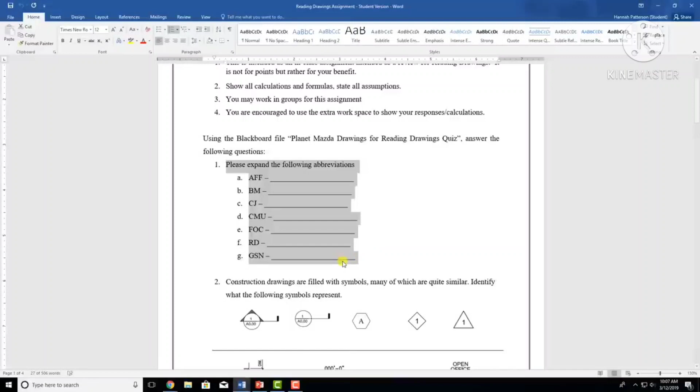So this is about 25 questions, I believe, and it takes the students through a set of plans. This is called Planet Mazda, so anytime I'm saying Planet Mazda, that's the name of the project. The first thing students need to do is find out where to expand abbreviations. There are so many abbreviations in construction that there is no way one person can know all of them. They change with different companies and different sets of plans on different projects.

So understanding what the abbreviations mean is a really important part of being able to read drawings. Next, construction drawings are filled with symbols. I took snippets of different symbols, directly from the set of plans we're going to go through in a minute, and students just have to tell me what they mean. Because if you don't know the difference between this and this, or these two - which are both ones, but one is in a diamond and one is in a triangle - it's going to make it much harder to understand the drawings.

Now we're going to move down and look at the different images. There are different symbols like these, and then there are different shading and different material symbols.

So this right here, the squigglies, means something different than the hash marks right here, which means something different than all of these dots right here. So we're going to get through that in a minute.

Next is just basic questions. It's a little bit of a Where's Waldo, but it helps you know which section to go to. So the building envelope passed code inspection by what percent? Are these drawings SD, DD, or CD? We'll get to what those three mean in a minute.

Linear footage of 4-inch PVC domestic water line required. What is the ordinance number for the City of Las Vegas fire hydrant requirements? What is the total number of parking spaces between the existing car dealership, the new car dealership, and the sales inventory parking? This project is called Planet Mazda, Mazda meaning the car company Mazda.

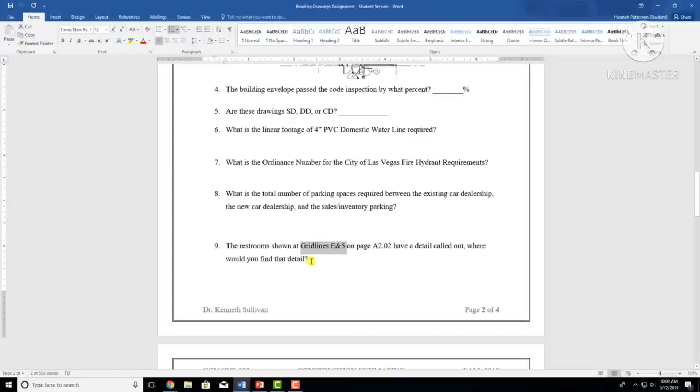Construction drawings obviously have a scale, and the scale might vary by page, or even on a certain page there might be a couple different scales. So that's one of the most important things to look at, especially in an estimating class. So we're going to look at the scales.

Then the service bays, how wide is each bay, so finding dimensions. The total length of the north wall from oil storage to the end of the service bays. So this is being able to pinpoint different areas and find dimensions.

The height of the building at the tallest part, that'll get us into elevations. What is the FFE? On which side of the building are the 4 primary signs? So this is all to do with the elevations.

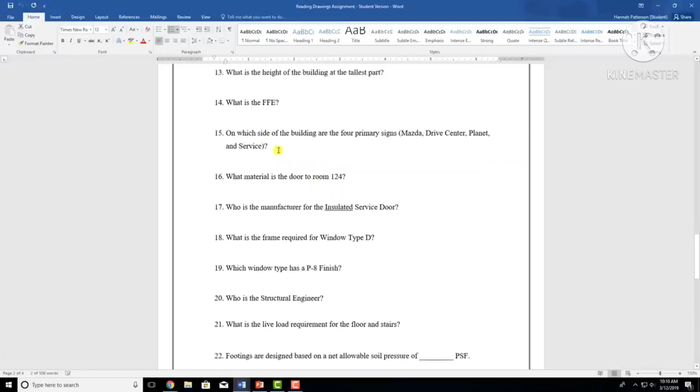What material is the door to room 124? Who is the manufacturer for the insulated service door? Notice insulated is underlined. What is the frame required for window type D? Which window has a P8 finish? So all of these are going to introduce the door and window schedule.

Who is the structural engineer is going to tell us who to contact if you have a problem or question. Live load requirement for the floor and stairs. Footings are designed based on the net allowable soil pressure of what PSF? And for a typical column base, what's the minimum concrete cover for structural steel below grade? So all of these are going to get into the structural notes and the structural details.

Also, for joints on slab on grade, what's the maximum allowable time to pass between placing the concrete and cutting a contraction joint? 12 areas on the foundation plan indicate a thicker foundation requirement. Identify where they are located and why the thicker slab is required.

So identifying where it's located is easy. The why it's important is kind of getting the students to think about the project, think about where those slabs are, and why it might need to be thickened only in those specific areas.

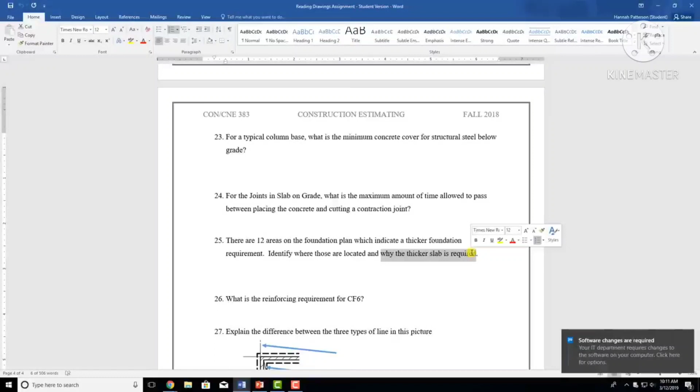Then what is the reinforcing requirement for CF6? So students also need to know what CF is, and then where to find the 6th one, and then also to find the reinforcing requirement.

Different types of lines on a drawing will mean different things. So this is also kind of going back up to the symbols and the different designations on the drawing. So we're going to get through the different types of lines. Then we're going to actually do a takeoff.

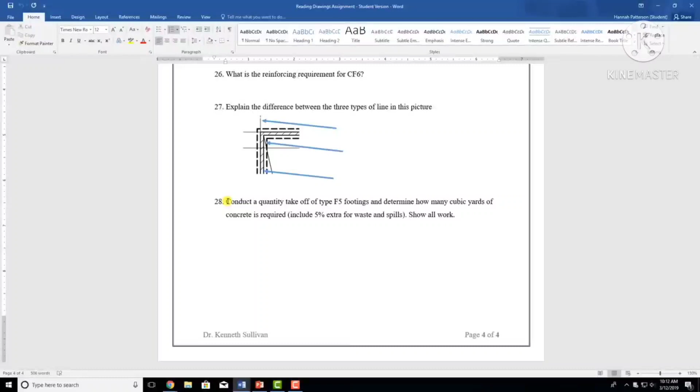So this is intended for a construction estimating class. We give this to the students at the very beginning of the semester, really without the expectation that they know how to do it. However, we wanted to see kind of where the class is.

Another thing that we ask students to do is to spend no more than 1 hour on this assignment. Our class of about 100 has a very wide variety of experience and different majors. We have a few people that have only ever taken construction classes, and a few where this is their first construction class. So this really just gives us a baseline of where they are in the class with reading drawings and being able to understand what they're looking at if we give them a set of plans.

So we tell them to take at most 1 hour to try and solve this, and then see where you get. We're now going to move on to the plans.

I'm going to walk you through those real quick. So these are the Planet Mazda plans, a 14-page document. I'm just going to flip through real quick.

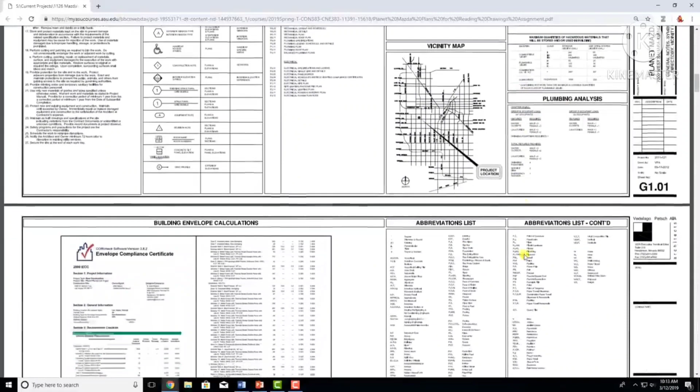So there's a rendering, there's the different contacts, then you've got your first page with all of your general notes. I'm just going to scroll through so you can see what we're looking at: there's a cover sheet, more notes, site plan, then floor plan, elevations, windows, doors, notes. I really just tried to take at least 1 or 2 pages from every section, so that students can understand better what they're looking at if they're given an entire section.

So in order to start with the basics, I'm going to go to a little PowerPoint we have that goes through just kind of what construction drawings are, how they're broken down. It's like a book kind of. So, basics of reading construction drawings.

So there are different sections within a set of documents. You have your civil, architectural, structural, mechanical, electrical, and plumbing. These are also going to vary by the drawings, but pretty much every set of plans will have these, which is why we included these. These are the main 6.

However, it's also very common to have your fire protection, to have your site work somewhere different, to have your landscaping. There's a lot of different things that can go into it, and we'll get into knowing what section you're in just a second.

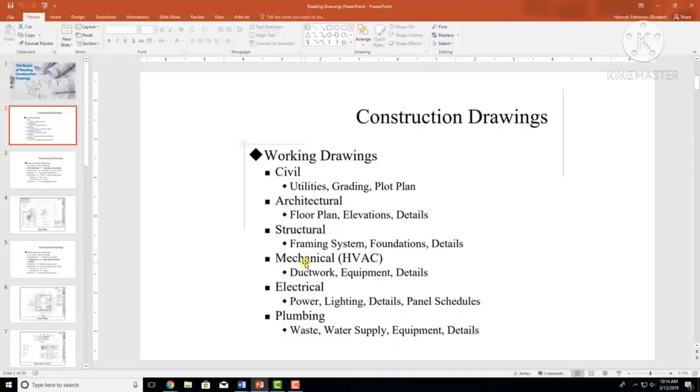So we're first going to start with our site drawings. Notice that it goes site drawings C. So each page, if I bring up the drawings again, each page will have a little note in the bottom right.

G1.01, that is your page number. G means general, and 1.01 tells you the page. So if I tell you to go to M2.02, that means mechanical 2.02. You can see they kind of go in order, G1.02, and then here we have an entirely different one.

So this was done by a consultant, this one's for the landscaping. And we're going to get into another one, and see it says 2 of 7. However, since I snipped them all together, we don't have most of these.

Then we get into A, 1.01, so these are your architectural. Here's more architectural, see we jumped quite a bit. Then you've got more architectural, architectural again, and again. And then we get into S, which is structural.

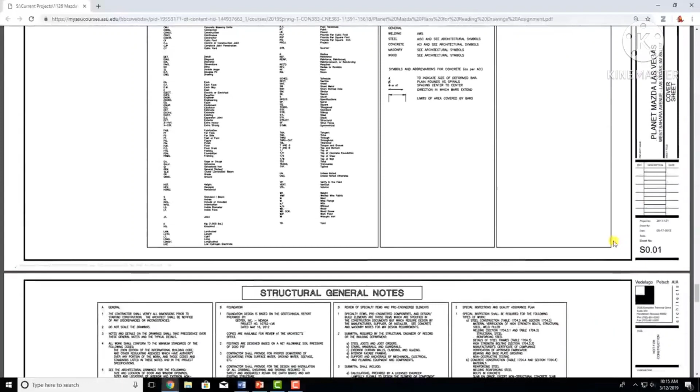So this is structural 0.01, which usually indicates a cover page of some sort. Then we have 0.11, and then 2.01, so now we're getting into the real meat of it. And then 5.01, and that's all I took from these drawings. But that'll tell you what page you're on, it's really how the drawings are organized.

If you don't realize there's an airport a mile away, it's going to be problematic. If you don't know what is in your surroundings, there's going to be a lot of problems that are going to arise later. So the site plan tells you what is around my site that I need to worry about.

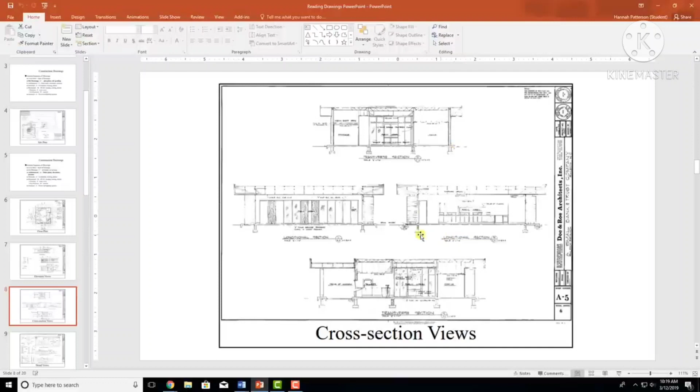Then you have your cross section. Elevation views are only from the outside of the building. Your cross section views would be if you were to cut your building in half and look at it from a certain point. We'll get into the different cross section designations in a bit, but a cross section is if you were to splice your building in half, or maybe just take a certain room, and it will show you a very detailed breakdown of that room. So you have your different cross sections.

Then you have details. Details are going to be in areas that need special attention. Oftentimes something like an ADA restroom will have a specific detail to it, because those dimensions have to be very precise. Anything which needs special attention will have a detail.

Then you get into your schedules. A lot of people confuse this with a time schedule, so this is not saying I need 4 months to build a project. This is a table that outlines the pertinent information, typically for finishes, doors, and windows - those are the most common. So it'll say something like Office 1, Room 101, then West Wall, paint, East Wall, paint, North Wall, glass - something like that, where it tells you the finishes for each room.

Then you have your doors, because there are numerous different kinds of doors - they might have different finishes, some might be metal while some are wood. So it'll say Room 101, Office, Door, Wood, or it'll say Room whatever, Kitchen, double swinging metal doors. And those will all be abbreviations too, so you'll have to know how to get back to the abbreviation section. Then it'll tell you the different kinds of windows that are in the project.

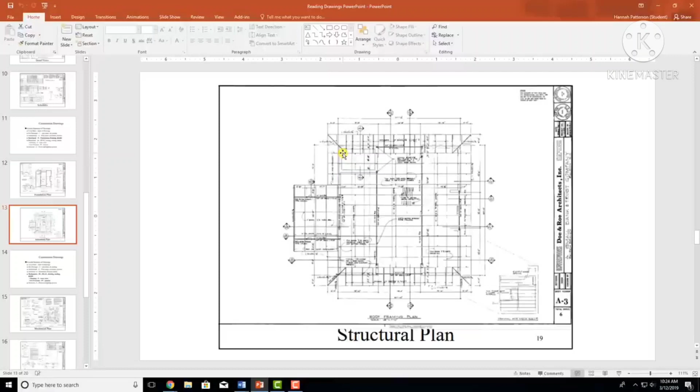Now we're going to get into mechanical. In our estimating class, we don't have the students worry about mechanical, electrical, or plumbing because there are separate classes which focus on those. So I'm going to go through these real quick just so you know how to read them, but we're not going to focus on them at all.

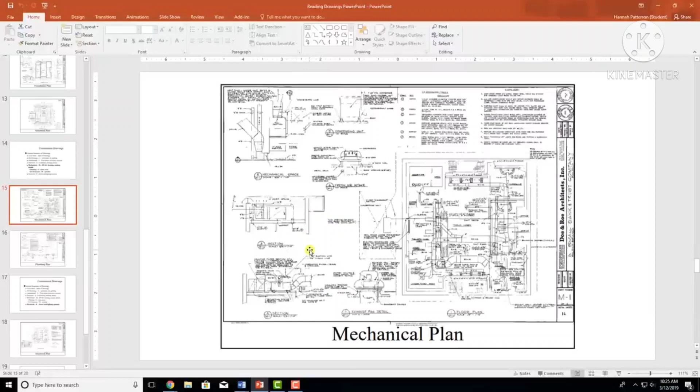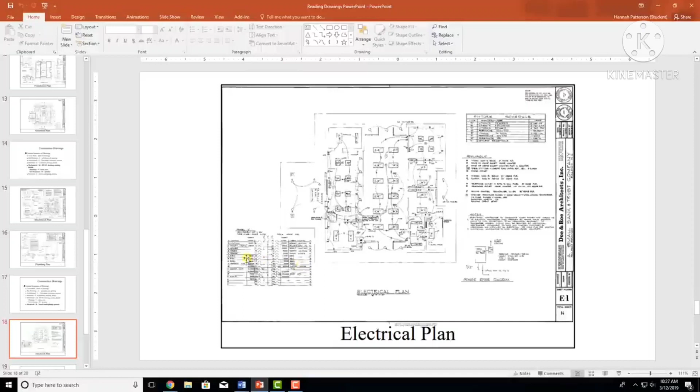So then keep going, and you'll see these are also lights, so that's a different kind. And it looks like there's a schedule here and here. They're just very hard to read because it's very poor quality, but these will tell you, alright, this rectangle means it's this kind of light, this circle means it's this kind of light, this square is this kind. So it really breaks it down so you know, alright, if I have 18 of these rectangles, it means I have 18 of this light fixture.

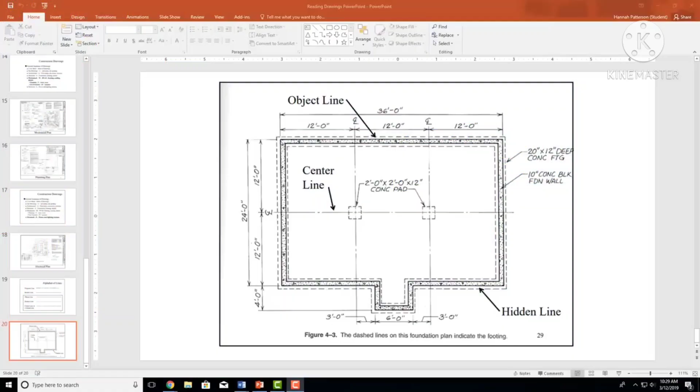So here's our answer key. What I'm going to do is read the question, and then we're going to go to the drawings, and I'll show you where I found the answer. A lot of these will actually have the answer right there, but it will tell you where you want to be looking for it.

So we're going to start with question 1: expand the following abbreviations. Looking at this, your abbreviations will be found pretty much on the first page. I'm in the general section here, and this is where all this writing is, so it's pretty easy to read through it real quick. General notes, not what I want. Project directory tells you who's in there, not what I want either.

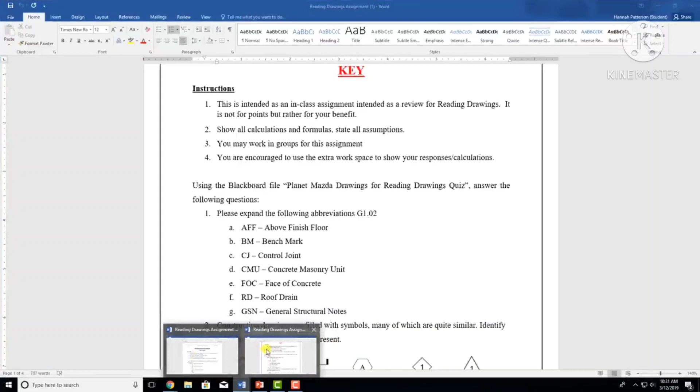Symbol legend - since we looked ahead on this assignment, we know we're going to need that in a second, so tuck that in the back of your mind that that's where the symbols are. Then we're going to go back because that wasn't what we wanted.

So we've got sheet index. This is a really important part of the drawings - knowing what sheets should be included. Clearly you don't have all of them because you only have 14 pages in this version, but this is telling you what sheets should be in there if you have a full set. One of the most important parts of being an estimator is checking to see if you have all the sheets, because if you're missing one of these, it could mess up your estimate by a lot. So before you sign off saying 'yes, I have received the drawings,' just flip through real quick and check: do I have A401, A411, A412, A501, A502, and make sure you actually have everything.

Also, keep in mind how these are organized - this is a really good way to see it. Here's your architecturals, which all start with A. Within architectural, you have subsections. ADA is the Americans with Disabilities Act, so that is all of your accessible bathrooms, wheelchair ramps, signage, things such as that. You have ADA 1, 2, and 3, so those are your ADA details.

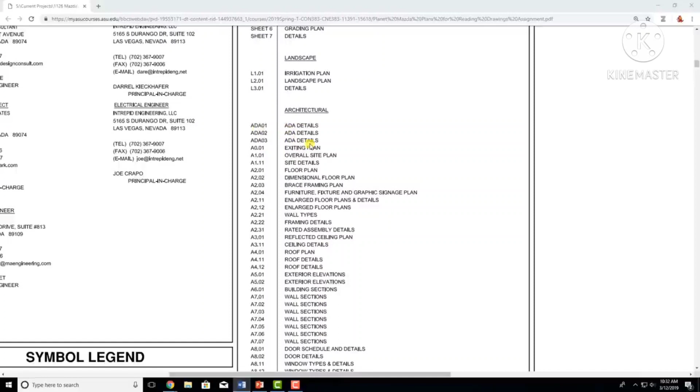A0.01 is exiting, and then A1-point-something shows your site plans. A2-point-something, which you can see there's a lot of them, is going to show what your actual building looks like. Then you get into A3, which is your ceiling - reflected ceiling plan and ceiling details. A4-point-something is all of your roof. A5-point-something is exterior. 6 is your building sections. A7 all the way through is all your wall sections. 8 is your doors and windows. Then 9 is finish material, room finish schedule, and all your interior - so 9 is really all of your finishes and interiors. And then 11 is just anything miscellaneous.

So it's broken down pretty straightforward, but keep in mind this will change for all the different jobs you're on. So if you're looking at 3 different drawings, they're all going to be somewhat similar with what goes into architectural and structural, but they're going to be numbered differently depending on the company and the architect.

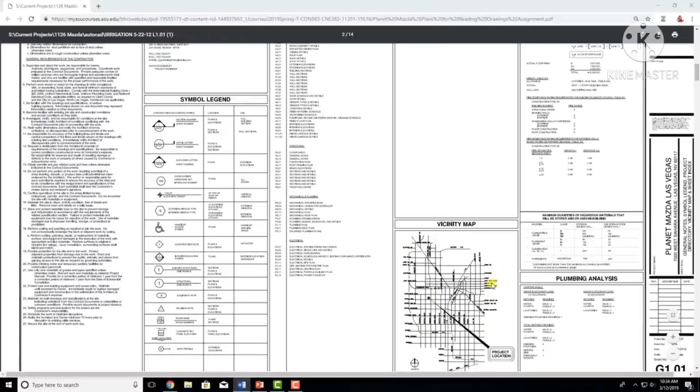Then up here, your code analysis, so this is to see if your building is actually up to code. Then you've got a plumbing analysis and the maximum quantities of hazardous materials that will be stored and or used in the building. Depending on what you're building, you might have hazardous materials. This is a car dealership, so it's probably not going to be much, but if you're doing something like a research lab or a hospital, there could be hazardous materials you need to be aware of.

Then we're going to move down. Here's the building envelope calculations. You also know you're going to need this a little bit later because we've read through our questions ahead of time. That's also a really good trick with estimating.

Sometimes it works best to work backwards. So instead of going through this one by one, read through all of these and think, oh, down here I know they asked for the building envelope calculation, so I know I need to remember where that is. That's also a good idea if you're going to use RS Means or some other pricing tool like that. Look at the unit and then do the takeoff. I get into that in some of my other videos, but keep that in mind.

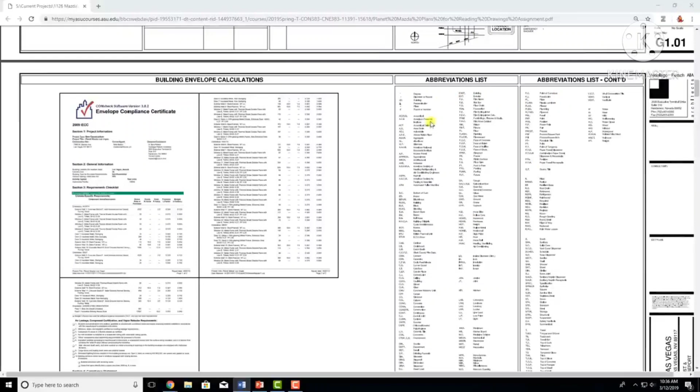So we're going to keep going, and we finally get to our abbreviations. This is what we need to answer the first question. It's pretty straightforward. You've got first symbols, then A's, B's, C's. It's just alphabetical.

The ones I specifically asked for are AFF, which in this case means above finished floor. That's one I chose, and most of these I chose because they're some of the most common. AFF is used in probably every drawing you will ever see. So a good example would be that this building is 122 AFF, which means it is 122 feet above finished floor, which basically tells you the height of the building, which we'll get into a little later.

The next one I asked for was BM, which can mean a couple things. It can either mean benchmark or beam. I didn't specify which it was, so either one is okay to answer.

CJ is the next one, which is control joint. That will be something used with your structural notes typically. Architectural will reference it so that you know how to build around it if it needs to be incorporated into the building, but where it really matters is your structural notes.

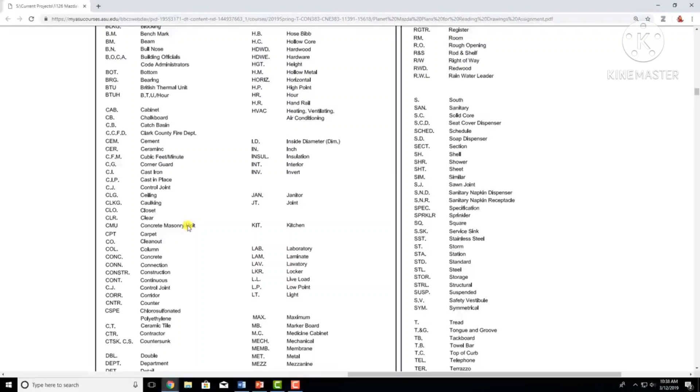We're going to get into CMU, which is right here, concrete masonry unit. That's if you're using concrete blocks to build your building. Then FOC is the next one, so we're going to go up here to F, and FOC means face of concrete.

Next one I asked for was RD as your roof drain. And then GSN is the last one I asked for, and that one's a bit tricky because it's not on here. That is something that is a very, very common abbreviation used in construction, but it's not really written anywhere. GSN means General Structural Notes.

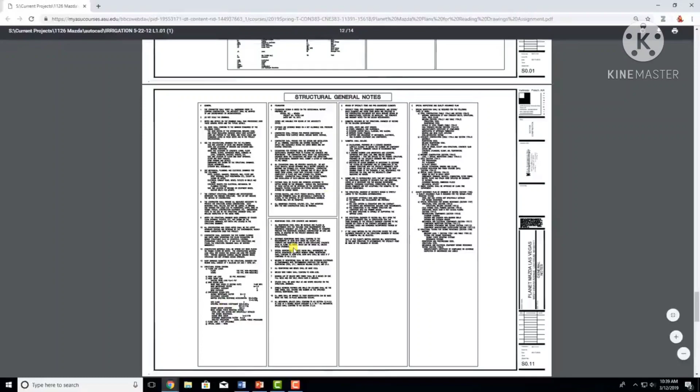On different pages, there's going to be different notes. So if I go down here to my architecturals, I've got general notes and keynotes. There are notes all throughout these drawings, and your GSNs are your general structural notes. In this case, it was structural general notes, but it basically means the cover page before you get into the actual floor plans and the drawings will just have a ton of notes. These notes have a ton of information that you need to know, like different requirements for reinforcing steel, your foundation, specialty items, your general notes.

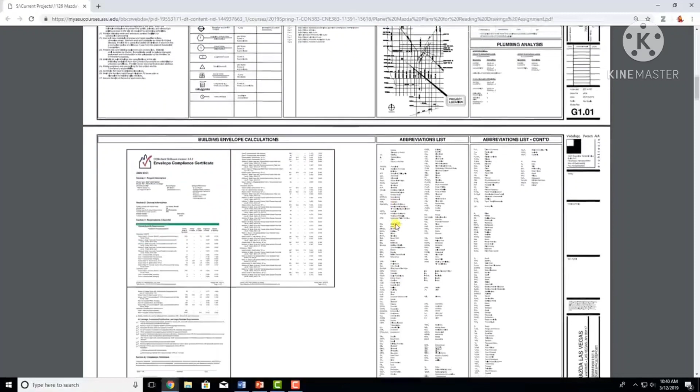So this tells you, alright, your building is concrete, but now I need to know what are my reinforcing requirements, how long do I need to wait before saw cutting, different things like that. What are my ASTM requirements? So your GSNs have a lot of information. I wasn't necessarily trying to trick the students, but they need to know that if a note says refer to GSN, it means refer to your general structural notes.

Alright, so we got through the first one. Now we're going to move on to here, to your different symbols. I mentioned that we pasted those, and those were taken from right here. I'm going to split the screen real quick so you can actually see which ones I'm asking for and which ones we're looking at.

So the first one right here matches that, which means it's a section number, a section indicator. We're going to get into that in a little while, but when you see that on a plan, this section is going to be much longer, so it's essentially going to slice a building. Going through the PowerPoint, I mentioned the different sections, and that's how you know if something is a section number. This top number will tell you what section it is, and the bottom number will tell you what page to find that cross section on. It's almost identical to a detail, except a detail doesn't have that arrow.

So the detail was the next one, and it's right here. Instead of going through these one by one, I'm just going to go through all of these. So you have your elevation, which looks very similar to a section, but instead of cutting the building in half with this line, I'm just looking at the whole building. This is going to show you basically all of it.

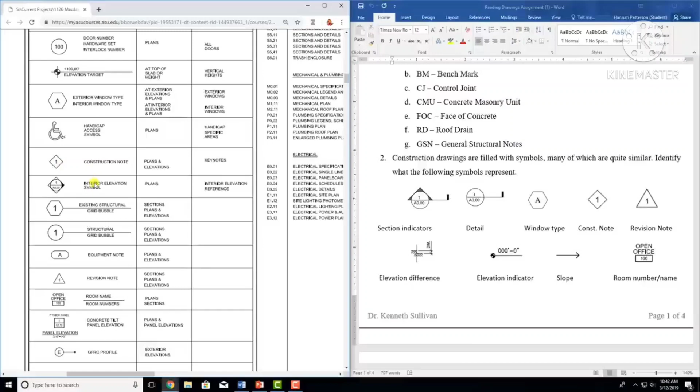It's a diamond with a number. If I jump ahead to your actual plans, this is a great example. All of these are notes, and every one has a different number that points to a different thing. If you scroll over, they all correspond to these keynotes. So again, it shows you up here the little diamond.

So if I go right here to this one, number 5, I don't know what number 5 is, I don't know anything about this right now. So you scroll over to number 5 and it tells you it's a metal panel, MP-3 typical. TYP means typical. So then you know, anywhere there's the number 5, it's a metal panel.

13, we don't know where that is. It's a little tiny thing sticking up right there, and you know it's signage. You're looking at the side of a sign, so it looks completely flat. But if you go over here to the other sides, on our elevations right now, you'll see the signage again, and there's the actual sign itself. So you're looking at this drive center sign right there from the side. If you zoom in there, you'll see that 13 again.

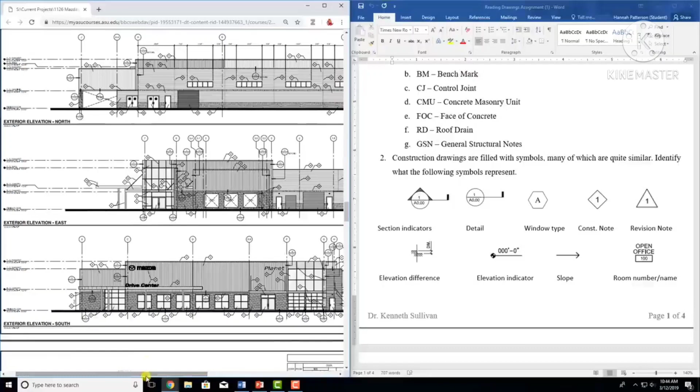So that's what a keynote is, and those are imperative when reading drawings. We're going to go back up and go through the rest of these symbols. Alright, so the next one is an interior elevation symbol, a little bit different than this one, which is an exterior elevation. These aren't as common - typically it'll just be section numbers instead of interior elevations, but it's good to know if you do come across one. Then you have existing structural, so it's a hexagon with a number.

So keep in mind, this is a hexagon with a letter for a window type.

A hexagon with a number is existing structural. Then you've got new structural, a circle with a number. So instead of existing, this is new. And this is very similar to your doors. However, if you look at the number, all of your doors will be in the hundreds, or will be 3 digits. So very similar designations, but very different meanings.

It's also good to just use a little bit of common sense when looking at the drawings. You know, there's going to be a lot of different door numbers. They're probably not all structural callouts. So if you have numerous of these, and they all seem to be in doorways, they're probably not structural.

This will be an equipment note, a revision note, so this is a good thing to know, because if you get different versions of a set of plans, it's going to change different areas of a building, and it might change them enough that it's a drastic difference. So let's say they take a bathroom that wasn't ADA compliant, and they make it ADA compliant. That is going to be a very big revision, and it's usually also going to have a cloud around that area. Unfortunately, I don't have an example of that in these drawings that I'm aware of. We might come across one, but it will look like a cloud, and it will have a revision note saying, change bathroom to be ADA compliant, see detail, whatever. So it'll tell you, hey, this changed, make sure you notice this.

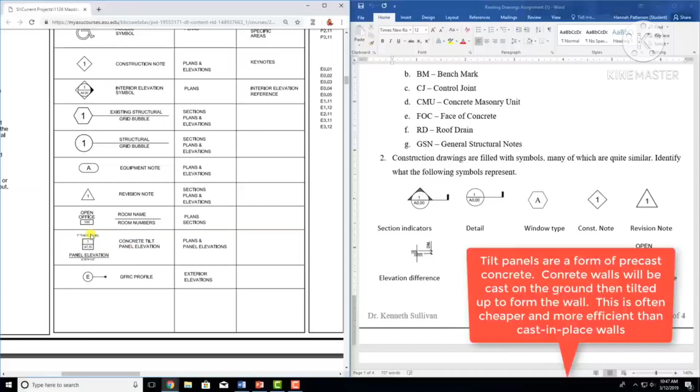Alright, keep going. We get concrete tilt panel elevation. So if this is a tilt-up, which I assume it is since this is in the symbols, it's going to tell you the different panels and where to find the elevation, which means looking from the side of that panel. I cut all of those out of this in my little 14-page version, so we're not going to worry about this. And then you have GFRC profile, and GFRC, I'll tell you, even I had to Google this. There are so many different abbreviations for different plans and different everything, it's glass fiber reinforced concrete. So this is going to be a concrete structure, which we'll get into later, looking at the different shading of the drawings. But if it has a circle and a letter, it's the GFRC profile.

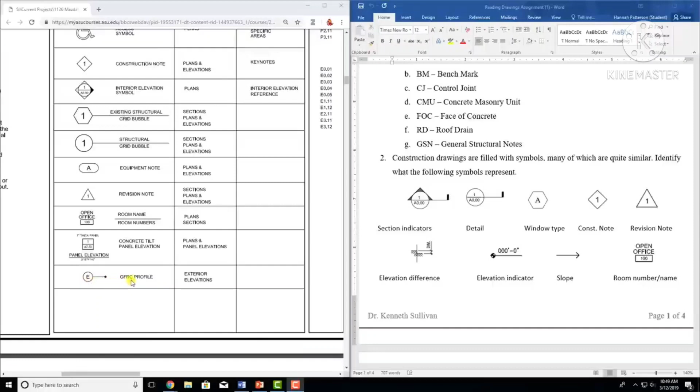Alright, so now we're going to get back into this. So I went through this top row and this bottom one, but I never saw these ones. So we just went through all of the different symbols, but never saw these. But as I told you, I took all of these straight from the drawings. So something to note, those were architectural symbols. Now we're going to move down, and we're going to get to the structural ones. So each different section will have a cover page with new abbreviations and new symbols. So it's a really good thing to keep in mind that if you're missing some sort of abbreviation, it might be in the structurals instead. So a lot of these are going to be similar, like CMU, Concrete Masonry Unit. That was in the architectural as well, but a lot of these won't be. So keep that in mind.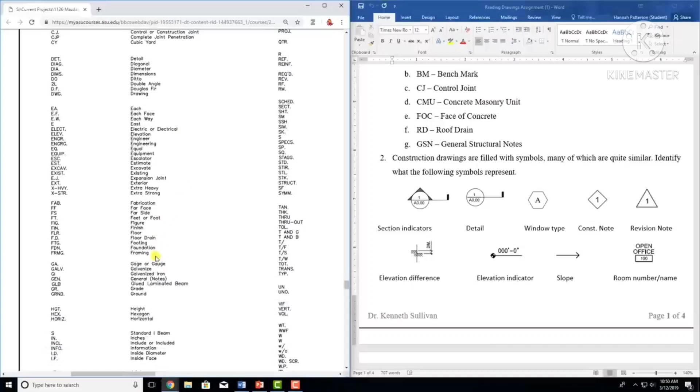And we're going to go over to these symbols, and now we can find these ones. So this is a change in elevation, so this will be used most commonly on something like a curb in your parking lot to show you how tall the curb needs to be, or maybe on a staircase, but that's less common. Elevation indicator is very similar to what was shown in the architectural ones, but just to show you there's a couple different ways it can be drawn. And then an arrow, which most people don't realize, is a slope. So the most common slopes are going to be on your roof or in a parking lot where you need to slope it towards a drain.

This is a car dealership, so there are going to be floor drains in various places in case oil spills or in case they need to wash something, and it's going to show sloping. It will also be in every bathroom because there's always a floor drain in the bathroom. If there's a shower, or if you're doing a research lab that has one of those emergency showers, you're going to have to slope it. So keep in mind that different symbols, even though you might think it's just an arrow pointing towards something, that might not be the case, and it probably isn't.

So real quick, we're going to go through these again. So this is a ramp. If it has this dot at the end, that's specifically showing a ramp, such as ADA, or maybe it's a loading dock or something, and this is going to be a very gradual slope. If it's this other one, it's just enough so that water goes, but not enough that a person walking on it would really be able to tell.

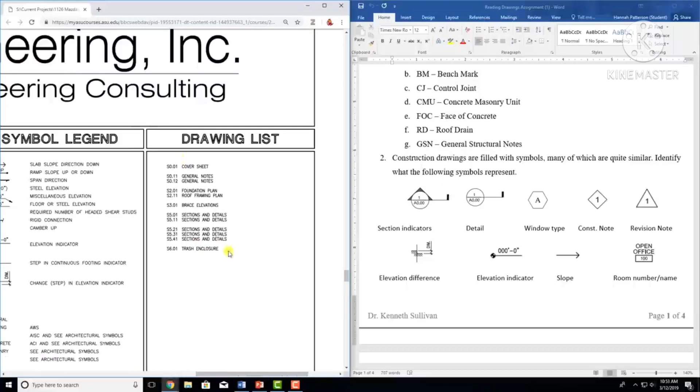Then we get a little bit more into symbols and abbreviations specifically for concrete, and up here we have a list of our drawings. So that's everything for the symbols.

So now we're going to go back in here and see what's next. Alright, so just cruising right along.

We're now on number 3, which has these different - they're not so much symbols as shading or coloring, or I guess you can call them symbols, but it's basically the different way materials are indicated on drawings. These are going to be the same throughout all of your drawings, so it doesn't matter what your company is, doesn't matter what the project is. There might be very slight variations, but for the most part, these are going to stay the same.

So the squigglies right here are going to indicate insulation. Masonry walls - this dash line, this 45 dash going all the way down, is masonry. So right here, where you have that 45 dash, that's masonry. Then this one right here with those darker lines, see how it's only around that one room? If you actually look really close, it has the masonry lines under that, so this dark dash right here indicates fireproofing of some sort.

The different level of fire rating is going to depend on the room, and that'll depend on the drawing. But this is an electrical room, which means it's more prone to fires, so it needs to have a higher fire rating than the rooms around it. So that's what those dashes mean.

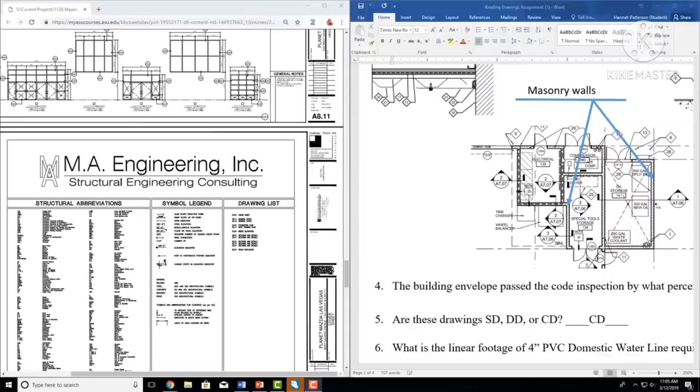And then if we look up here, this is concrete - when it's got those speckles, that'll be concrete. You can tell this by looking at the drawings. A pretty good way to tell is if you go to the details - that's actually where I got these from. So this is that exact detail. I did tell the students that all of these snippets came exactly from these drawings, so they can just search for that exactly, and this 8 down here is pointing towards the concrete.

So it's kind of speckled with little triangles. We don't know what that is, but we know that's a keynote, so we are going to go over here to our notes and look at 8, and it says concrete floor.

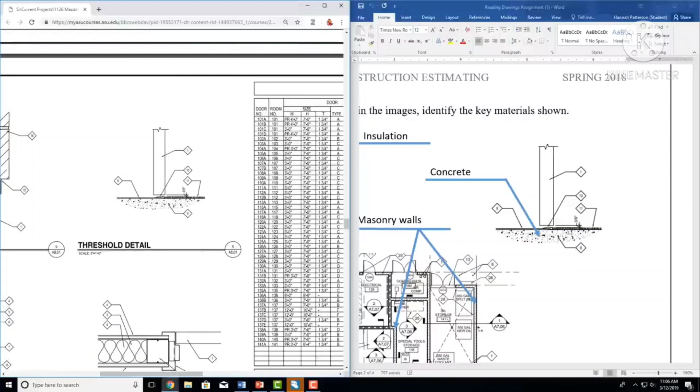So anywhere you have those speckles, especially if there's the little triangles, that's a concrete floor. I challenge students to see if they could figure out what the rest of this is. Just looking at this, you now know it's a threshold detail, but this is flat, and then it gets kind of raised, and this is floating. So think about what could go from flat to raised with something floating — this is a door, so this is a doorway. You can tell that by looking. Alright, so number 9 and number 11 and number 10.

So what are those? Go here. 9 is VCT as scheduled, which is vinyl composition tile. It's pretty typical, especially in apartments or new office buildings, where it's that fake wood looking stuff, but it's actually more of a tile than it is wood. So it's basically fake wood.

Then floor transition strip as scheduled — that's where this 10 is right here. See how it's just raised very slightly? That's often called a Schluter strip because that's the most common brand. It's a little tiny metal strip, and you probably never noticed them, but if you start looking for them, they're everywhere. It's just to create a smooth transition from the tile to 11, which is carpet. So this goes from the VCT to a little strip to carpet, which means that this 1 right here is probably a door, which it is.

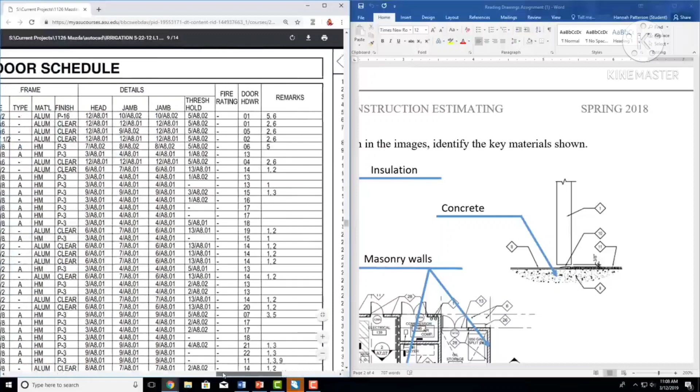So keynote 1 means a door. A good way to tell is this is your door schedule — if we knew what room this is, we could tell you what that door was made of and everything. Like I was showing you, this room number corresponds to the door number typically. So room 101, room 101, room 101, room 101, 101A, 101B, 101C, 101D — they almost always correspond. Keep that in mind, but not always, so don't assume, just flip to that page and check real quick.

But we're going to keep going now with the different kinds of materials. Let's move over to this insulation one — let's see if I can find this real quick. I don't remember off the top of my head the detail, but it doesn't matter, because this symbol is everywhere, and the squigglies will always mean the same thing. So this squiggly is either 5 or 6, we don't know — they both look like they're pointing there. Let's go over here to 5 and 6 and see what they say.

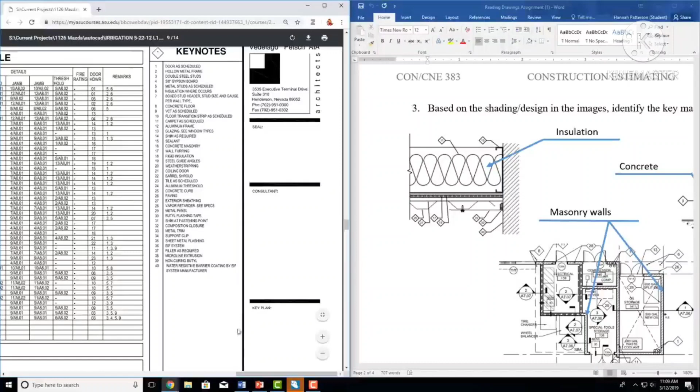5 is metal studs as scheduled. 6 is insulation where occurs. So the 5 there was pointing to a metal stud, and the 6 was pointing to insulation. If you're not sure, you can just keep going until you find one that's isolated. So we're going to keep going and see what else we can find.

So here's some hash marks. This is either — the 4 doesn't look like it's there, but it's going to be 17 or 18. So let's go over here and we're going to look at 17 and 18.

Wall furring and rigid insulation. Wall furring is when you have a structural wall that really isn't pretty, or you want something on top of it so it looks uniform, so you build a bit of a half wall in front of it. It's very common — let's say you have a masonry building, so you have those blocks everywhere, but you want it to be an office with drywall. In order to do that, you will do a one-sided wall which has no structural value and is only there because it looks good. It doesn't actually create a room, it's not a real wall, so that's called furring. It's also used for column furring — if you have a big concrete column in the middle of your building and it's not pretty and the architect wants to do metal cladding around it or something like that, that can be a type of furring. So there's a lot of different ways, but it basically means putting something on there so it looks different.

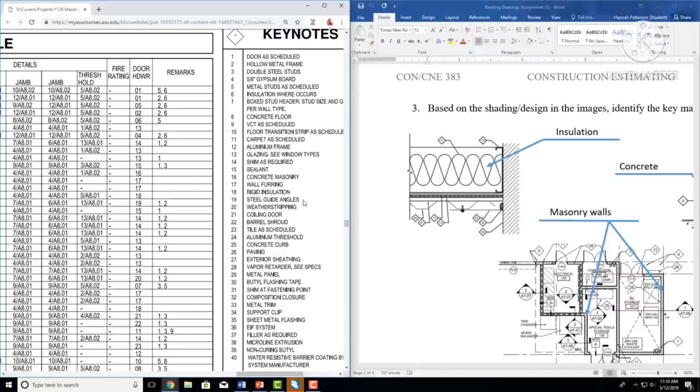Then you've got your rigid insulation, which is actually what this one was — so rigid insulation is going to be those marks. Then 16, can you tell what that is? 45-degree marks. So we're going to go over here and check.

And 16 is concrete masonry. Those 45-degree marks always mean masonry. So then we're going to keep going around here.

This is another threshold detail that's actually almost identical to the other one, except it's different. We knew that 10 was the transition strip, 11 is our carpet, we don't know what 23 is. It all looks almost the same. If I pull this one up on this one, it looks almost the exact same, but a little bit different. So 1 is always a door, 10 is always your strip, 11 is always your carpet, 8 is always your concrete. Let's see what 23 is.

We're going to go over 23, tile as scheduled. So instead of right here where you had the VCT, you have just normal tile. That'll depend on where you are in the building as to whether there's going to be tile or VCT or something along that.

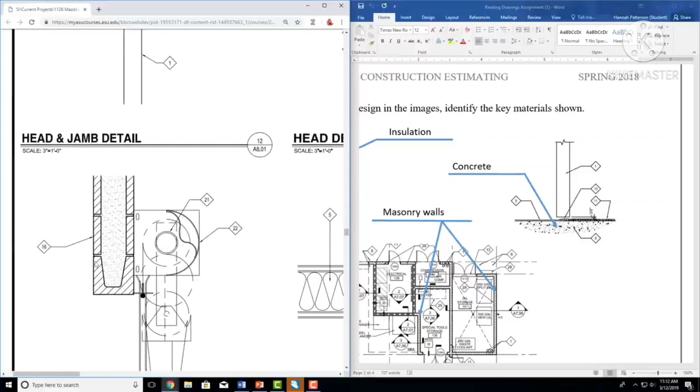We'll keep going, and a lot of these are going to be metal components, but look, that's 1, so that's a door. So this is going to be above a door, so this is a door jamb detail. Here's those 45-degree lines, so that's your masonry. This is a weird looking thing.

This is Planet Mazda, so it's a car dealership. If you look at this, what does this look like? Keep in mind this is a head detail, which means this is the top of something. So this is a wall that comes down and then stops, and this is all open.

This is a garage door, so this is going to cycle and pull up the door. This is the actual motor and everything where the garage door needs to be mounted. See this box right here? That's going to be your garage door mount.

So 21 and 22, let's see if I'm right. 21, coiling door; 22, barrel shroud. Coiling door is another way to say a garage door. It can also be called a folding door, or sometimes retractable door, but a retractable door typically means it goes into a wall, not that it folds up. A coiling door is the same as a garage door.

A barrel shroud looks like exactly what it sounds like. It's going to be something to hide the barrel of the coiling door, if that makes sense. Basically, it's a box that you put your garage door into.

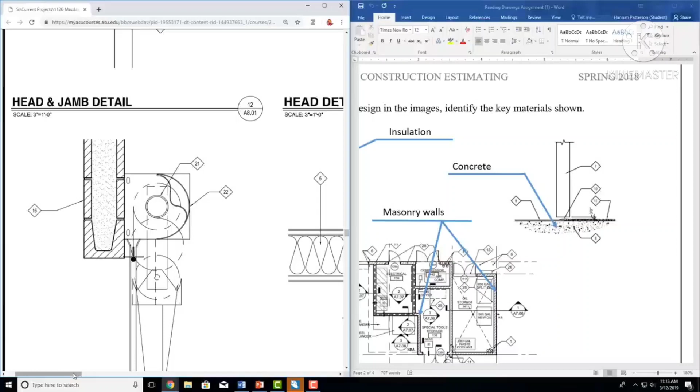Keep going. This is insulation, as we know, so we're going to keep going. You start to realize it gets a little bit repetitive. 1 is your door, so you know this is a head detail, above your door. Insulation. We don't know what 7 is yet, so let's check out 7.

7 is boxed stud header, stud size, and gauge per wall type. So that's going to be your wall header. And a header is basically just something above a doorway, so that will have your doorway components. That's going to depend on the wall type.

You're going to keep going down. That's a frame. You can tell it's just going to be metal, most likely, because it's just a solid line. That usually just means it's a metal component. Here's your different door types.

So these are door type elevations. We have our door schedule up here, then some remarks, and then our door types. So these are your folding doors, coiling doors, garage doors, whatever you want to call them.

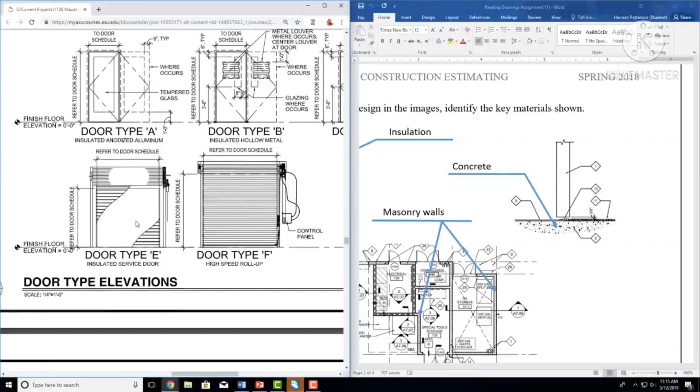So they're going to coil up there and pull up. Then you have just the normal ones. This is one that is probably into an office or something, maybe a conference room. It's going to be wood here, and this is glass in the middle, tempered glass.

Over here, this might be into a workspace. It looks like it's ventilated, so metal louver—that's a ventilated door. And then you've got a pretty typical door where this part is glass, but the rest of it is wood.

And then one other one: these look the same, except this is a solid wood core and this is a hollow metal core. So it's a different door material, even though the door might look pretty similar, especially when you're not looking at the door itself. It's the exact same dimensions, pretty much everything, except for what it's made of. Alright, so we're going to keep going.

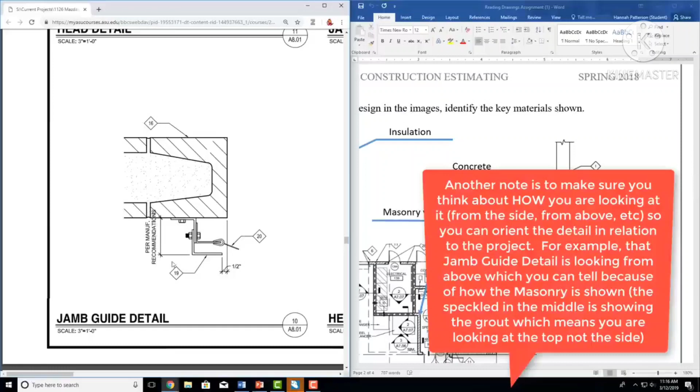I kind of skipped a little bit, but it does get to be repetitive. Again, this is CMU, this is going to be a jamb guide detail, so you can go through and look at these if you want to. Pretty much just look at something, and if you don't know what it is, look at the notes and read it.

And you'll start to realize the more you just think, oh, what is that, and look, the more you're going to retain. So instead of saying there's some masonry and some stuff under it, go look at the rest of it and see what it is. So we'll keep going. Insulation, all metal. This is all framing, so these are framing studs. And then we've got a lot of different details here. There's a door with some windows.

These are all going to be windows, I presume. Yep, so here's window type N. See that hexagon with an N? We know that means a window type. So a hexagon with a letter is a window type.

So this is telling you, if I zoom out here, these are all window types. So there are a lot of different types on this job. We're getting into W, V, U, T, S, I don't even know how many there are. There's a lot. And they might start to double, so you might have window type AA, or it could be A1, or something along those lines.

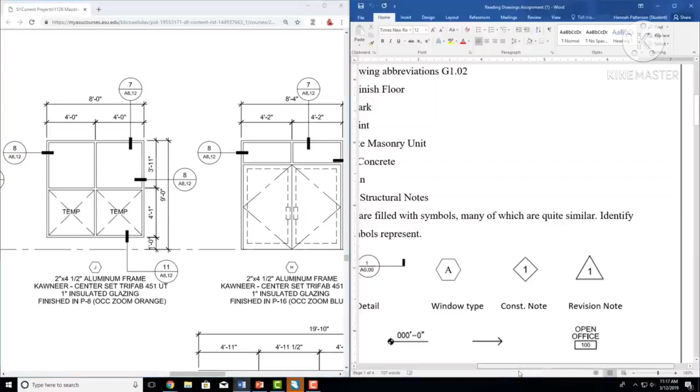But these are all the different ones. So anything you need to know about a window type, you'd come to this page. And under it, it tells you what it is, gives you specifics, and gives you dimensions, and these are all, as we know, details. So this is saying, to see this in better detail, likely it's going to turn it for you, so instead of looking straight on, you'll be looking from the side, so you can see the connections. Go to detail number 7 on page A8.12.

So I don't have that page in my little 14-page one, but it looks like a lot of these are on here. So this is 8, 8, 8, 7, 7. They seem to be a little bit repetitive, and you'll start to see that. But it looks like A8.12 is where most of the window details are going to be. So then you keep going, and again, there's a lot of 8s, here's a bunch of 3s. So you'll start to understand kind of what it is. So we're going to keep going down.

And that's about it for the different material types at the moment. So I'm going to move on to the next question.

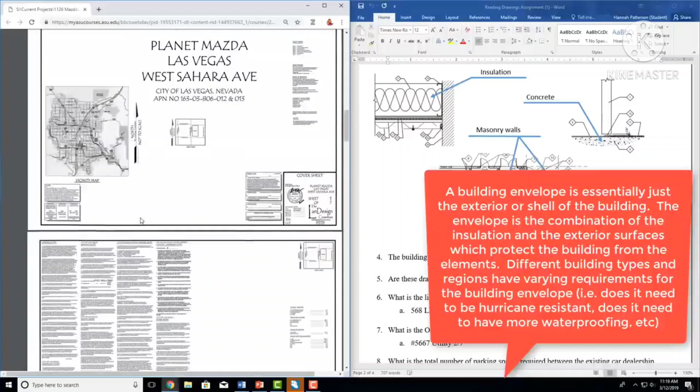The building envelope passed the code inspection by what percent? When I was reading through this, we made a note, oh, there's the building envelope section, and that was at the beginning. So if you weren't really sure, think, alright, where would that be? That would be something that needs to be written, and that's more of a note than something that actually goes into the drawings. So go up to your notes, and right here there's a whole section for it. Building envelope calculations, and I tried to make it obvious, it's this green here: design 18% better than code. So it passes by 18%.

The next one, are these drawings SD, DD, or CD? First we need to look at what SD, DD, and CD mean. This is technically written on these drawings, however, it's not going to be found in any notes or anything. SD means schematic design, DD is design development, and CD means construction document or contract documents. Technically both are used, but in this case, we're going to have CDs.

So SD design, your schematic design drawings are typically about 0 to 30% complete. This tells you how complete are my drawings. Is this a rough sketch on a napkin somewhere? Technically that's an SD. Or is it completely ready for construction, in which case it's a CD.

So DD is design development, typically 0 to 30, 30 to 60, and then 60 to 100. One way to tell, you can kind of look at this and know that it's pretty developed, but if you're not as familiar, another good way is to just go to the front page and you'll see 100% construction document set, so you know it's CD. This will often say it also maybe in the bottom right corner.

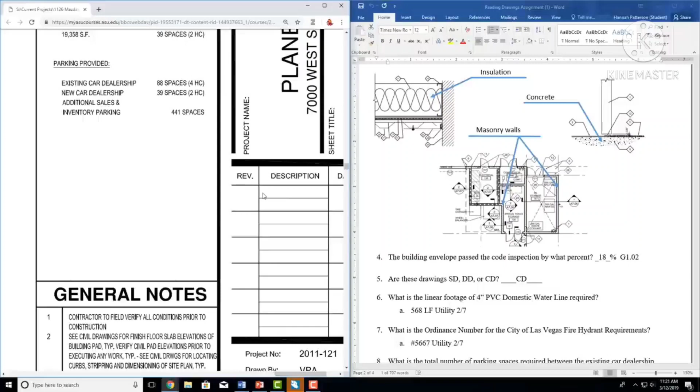And if you zoom in, it'll give you project information: who drew this drawing, the date, the scale, any notes here. So let's say this is version 3 of construction documents. It'll say revision 3, then it might say a page number that changed, or in general what changed, and then it'll give you a date.

That's very important, because if you're working off of outdated drawings, things aren't going to go well. Then it tells you what it's actually called, Planet Mazda. It'll tell you where it is, and then what this is—the overall site plan. So if we zoom out and wait for it to load, this is the overall site plan.

So it tells you, alright, what am I looking at? I have no idea, but I can zoom in. Oh, this is the dimensioned floor plan. So it'll tell you what everything is on here that you're actually looking at. These are your exterior elevations. Sometimes this will be down here, so it'll say A2.02 dimensioned floor plan.

It depends on the drawings, but that information will be somewhere on the right. Usually there's a disclaimer or a note, and a logo will go in the top. This might vary a little, but that's generally what it is. It makes it very easy when flipping through pages to find the one you want, since it's always on the right side.

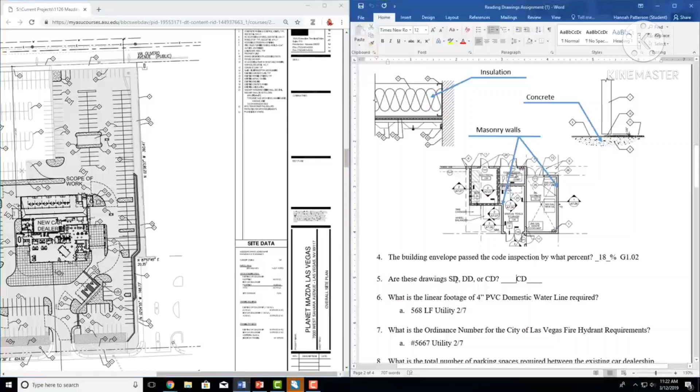So we're going to keep going. We now know these are CD, and we know schematic design, design development, construction document. So now we're going to move on.

What is the linear footage of 4-inch PVC domestic waterline required? One thing to keep in mind: by this point we don't expect students to know how to do a takeoff. A takeoff is when you take the drawings and quantify them into line items—you might say there are 82 hollow metal doors, 28 wood doors, quantifying it. There are 894 linear feet of baseboards, or something like that. It's where you take the drawings and actually quantify what's there. We don't expect them to do that yet.

We also told them not to spend too much time on this, so this probably isn't something we're having them calculate. What you want to do is think: linear footage of 4-inch PVC domestic waterline. A domestic waterline is going to be in some plan that needs water. It might be plumbing, but in this case I didn't give any plumbing, so the next most likely is your landscape drawings, which are here, and will give you all the information for water lines—maybe for a sprinkler or something like that.

And I'll tell you where it is. It's over here: private water, public water, private sewer. This is 4-inch PVC domestic water line, 568 linear feet. We're never trying to trick students, but we try to make them think a little outside the box—we didn't even give the plans that show that water line, so there's no way they could have done that takeoff. But they know it's in there somewhere, so it's a little critical thinking: where would that water line be, and where would I find that information?

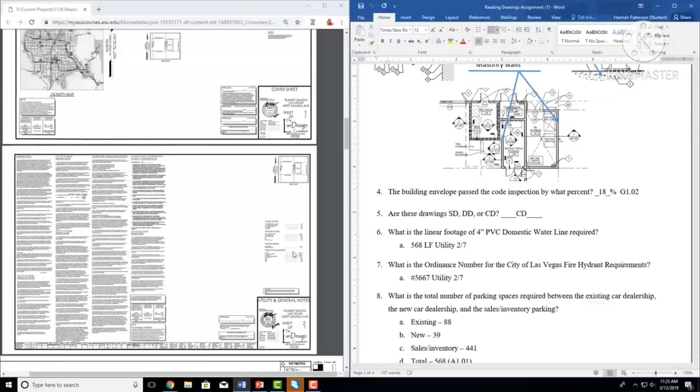So then we're going to go into the ordinance number for the City of Las Vegas fire hydrant requirements. This is also going to be on your site, maybe in the architectural notes or the landscape notes. Since we're already on this page, we'll look here—these are your general notes: City of Las Vegas grading notes, Las Vegas fire and rescue general notes. That sounds about right, since it's your fire hydrant. So we're going to go through this and try to make it somewhat easy, and it's just the first one.

All work shall be done in strict accordance with the City of Las Vegas Fire Department Ordinance number 5667. I also try to take things word for word, just so there's no ambiguity in the answers, so try to take that word for word. And we're going to move on now.

Where would you find the total number of parking spaces? So between the different sections, if you're looking for parking spaces, what would you be looking at? Are you looking at landscaping, structural, or architectural? In this case, it would be something that's architectural, and it's going to be the entire site, because it's not actually a building, but it's on your site.

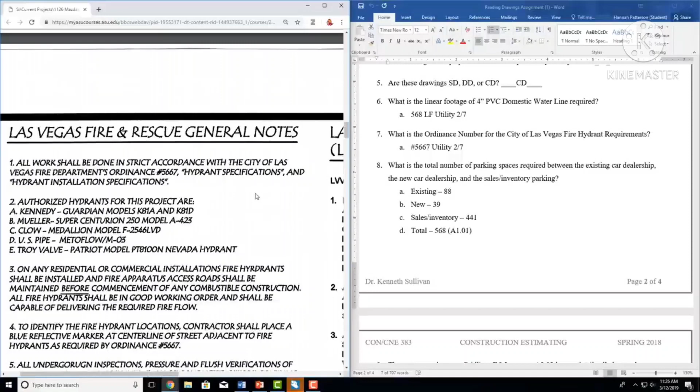So we're going to go now down to our architecturals, and right here you can see this shows us all the parking spaces. So we're going to go down, and what you could do is count them. But keep in mind, we only gave students an hour to do this whole thing, so we're probably not going to make you count it, because that is tedious and frankly a waste of time.

You could count it, or you can go right here to the site data section, and it tells you: parking provided, existing, new car, additional, and then all they had to do was add up those three. So existing, new, and additional inventory for a total of 568. So that just saved you about 10 minutes of counting spots and a lot of frustration.

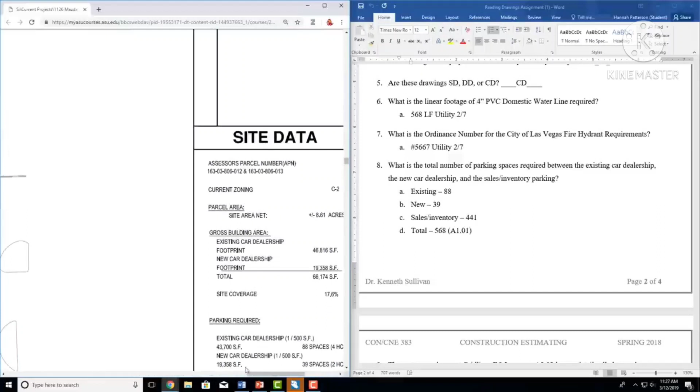So one thing to note also, if we go back to the site data, to kind of just go through it, this is a lot of good information. So this is your zoning requirements, which tells you how the plot of land has been zoned. Parcel area, so that's how many acres. Gross building area, so the footprint of the car dealership that's existing is 46,000 square feet. The new car dealership is 19,000, so your total.

Parking required, so this is parking provided, this is parking required. So this is saying for every 500 square feet, you have to have at least one parking space. So you can't have this brand new building and not provide parking for it. So this tells you, what does the city tell me I have to have? So for 43,000 square feet at one space per every 500, you need 88 spaces.

Think for a second, what is this 4HC? So this is 4 handicap. So of your 88, you need 4 handicap spaces at a minimum. New car dealership, you still need one every 500 square feet. So you have 20,000, so you need 39 spaces with 2 handicaps. So they went bare minimum.

And then additional sales and inventory, so you can't really actually park there. So this is good to know for constructing it, but that is not, hey, welcome to our dealership, park and come in. These are taken by inventory vehicles. So there's 441 inventory spaces.

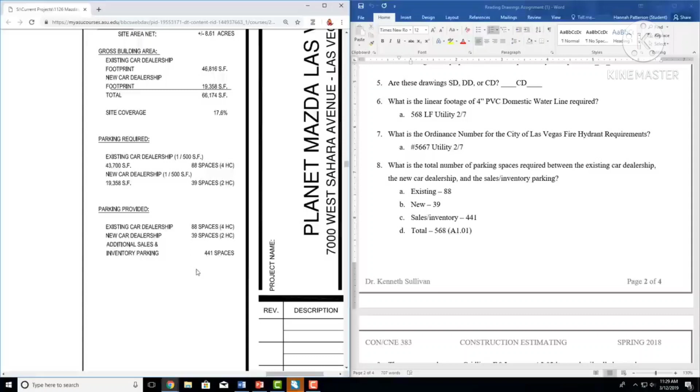Then you can keep going to your general notes. So there's always going to be general notes, and I don't know if there's keynotes. Yep, there's the keynotes. This is very specific, as we've talked about—this is a diamond, this is what the diamond means. And then this is going to tell you, in general, contractor needs to verify, see civil drawings, blah blah blah. So this is kind of your CYA notes, which is another abbreviation you can look up if you want to. But that's what this is. It's basically a disclaimer. So we're going to go back through and keep going on this right here.

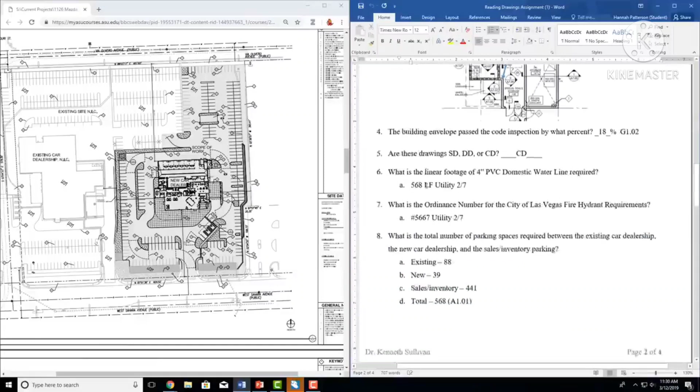So the restrooms shown at grid lines E and 5 on page A2.02 have a detail called out. Where would you find that detail? So this is whether or not you can read what this detail means right here. So I already gave you all the information: A2.02, grid line E and 5.

So around here, these are your grid lines. It starts at A, B, C, D, D.9, and you might have very specific ones if they're very specific requirements. E, F, G, H, J. Keep in mind there is no I. That is very common, especially in construction, because it is often mistaken as a 1. So I is frequently skipped.

So we're looking at E and 5. It goes letters down here, and then you've got numbers over here. So we want E and 5. So we're going to go down to 5, which is right here. I'm going to zoom out a bit.

So you got 5, go over and keep in mind where it is, and E. So right there, and then see that point is exactly there, but a restroom is not a single point, it's a room. So E5, and here's the restroom.

This dashed line, thick dashed line, around the entire room indicates a detail. So the detail is right here, and it's pointing to this line. If you look at how it's designated, it has a line. A detail line will make a box typically around whatever the detail is. This is telling you that on page A2.11, detail 2 will show this restroom. So this restroom does not have any dimensions, and it doesn't have any information in it really if you look at it.

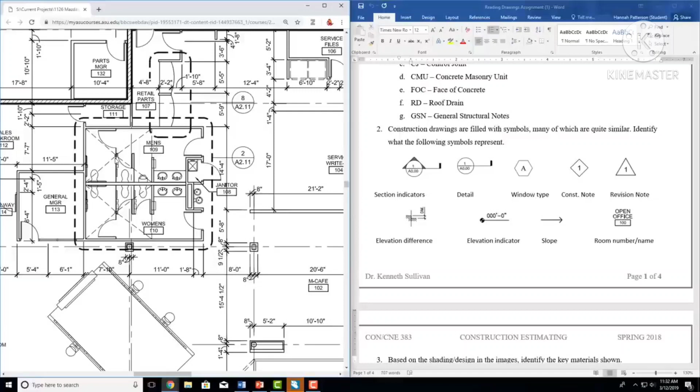In order to find the actual dimensions needed to build that restroom, you have to go to A2.11. This X right here, you'll see later on also, this indicates a slope. A slope could be indicated by arrows like we showed you on the structural, but in architectural, a slope is often shown with a big dotted X, and that circle in the middle is your floor drain. That's the location of your floor drain and how the floor is sloped to get there.

So we're going to keep going now. We've got through all of these, and we're now on 10. What is the scale on the dimensioned floor plan?

The first thing you want to do is go to the floor plan. You can read them over here. Dimension floor plan, that's already where we are. I kind of tried to put these questions in order, so keep that in mind also, that they might not be this nice in real life, but I tried to go in order. Dimension floor plan, and it will also say, not only here, this is what the page is, but if you look over here, this tells you what you're looking at in that snippet.

If we go down a bit, this tells you, these are all of your exterior elevations, but this is your exterior west, exterior north, exterior east. So if there's more than one thing on a page, there'll be something around here that tells you what it is. Especially on the details, you have detail, detail, detail, detail.

So look for that. We want our dimension floor plan, and our scale will always be directly under this. So dimension floor plan, zoom in, and you find the scale. We'll keep going, and I'll show you another example of that. Here's your exterior elevation west, zoom in, and you find your scale. So it's always under where that writing is.

A good thing to keep in mind is that there might be an instance where a page has a scale, but there also might be an instance where a detail has a scale. Let's see if there's an example of this. I'm actually not sure if there is. But for example, I told you that A2.11 has the detail for the restroom. It's pretty common that a restroom detail will take up about a quarter of a page. So you might have a restroom detail in this section and then smaller details around it.

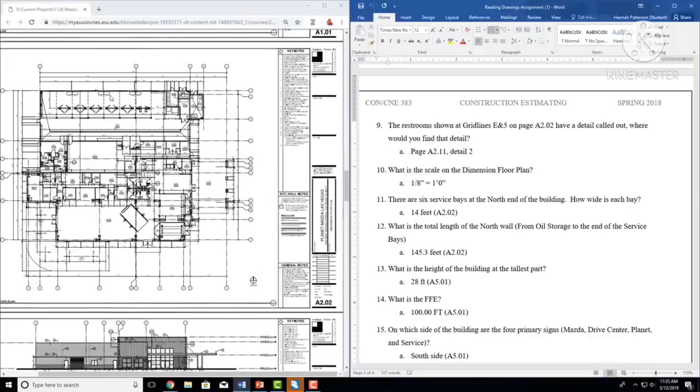Usually dimensions will be in your architectural. So north end of the building, we have our compass down here. We know north is going to be up, and so we're going to look. The north end of the building, these are the service bays. So if we look, we have 6 of them.

So, 1, 2, 3, 4, 5, 6. How wide is each one? It's 14, 14, 14, 14, 14, 14. So they're all 14 feet.

What is the total length of the north wall? That's going to be exactly where we already are. We need length, which is a dimension, which usually means architectural. And we want the north wall, which is exactly where we are. So we want from oil storage to the end of the service bays. This is where students often get tripped up.

Here is oil storage, again there's that X. You can tell that that's something that's going to need a floor drain. So there's the oil storage I'm talking about. And then all the way to the end of the service bays, which go here. So I'm looking for the dimension from here to here.

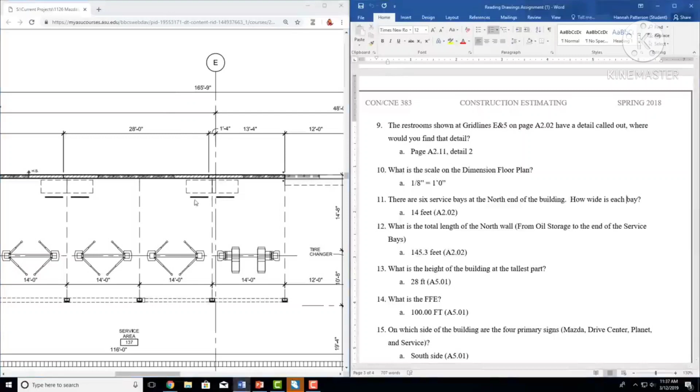What students will often do is go up here and say, alright, that is 165 feet. That was easy. However, look, it's not 165 feet, because you need to look at what those lines are actually showing you. So this is that 165, and it's going from one side way to the other.

So this is the pickup area for your car, or where you drop it off. This is kind of like a little drive-through area. That 166 is going all the way to the end. But I asked for oil storage to service bays. So it goes from right here over, which means you need to calculate it yourself.

So that means, see right here, takes out that little drive-through area. So you go from here over, and you just need to add up that one, and that one, or you can take this 166 minus that one, and you'll get 145 feet.

So now we're going to keep going. Height of the building. So something like a height, you're going to need to see it from a side view. To see it from a side view, you will need either a cross-section or an elevation.

Cross-sections show you interiors of the building. Elevations show you exteriors. We want the height of the building at the tallest part, which means an exterior elevation. So we need to find our exterior elevations, which happen to be the next page, and we're going to go to these lines over here.

So T.O., top of parapet. A parapet wall is, if you've ever been on a roof, basically a little tiny short wall that's used as a safety measure. That's what a parapet wall is.

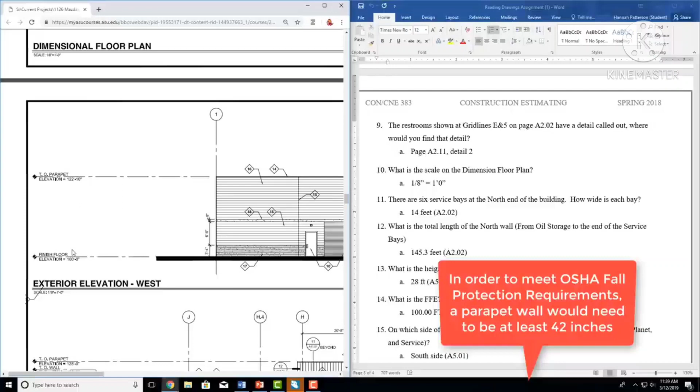They're usually pretty short. It can either be used as a safety thing, so if there's a crew working up there they don't need fall protection, or it can just be used as a little border, because typically you'll have HVAC equipment, gravel, a walkway and different stuff on a roof. It could be anywhere from 2 feet to, actually you could have a very high parapet if you wanted to - it depends on the building. But basically a parapet wall is a half wall that borders the roof.

So top of parapet, and then it shows you the elevation. We want the building at the tallest part. We're at 122 right now. So what is the tallest part? Just looking at this page, it looks like it's going to be this area here, which is the same as this area here, because keep in mind you're looking at it from all the directions.

So let's just go to this one at the top, because it's the most clean. And it tells us 128. However, that is not the height. That is the elevation, and we want the height of the building.

So the elevation is 128 feet. Our finished floor elevation, so the elevation of the ground basically of our building, is exactly 100, which means that our building is 28 feet.

Also just think of it kind of as a common sense thing. In general, your standard buildings will have 10-foot floors. That's a really good, just rough number to use. So a building that is 128 feet tall would be probably about 13 stories. And if you look at this, this is not 13 stories. So just think about it - my building is not going to be 128 feet. So your building is 28.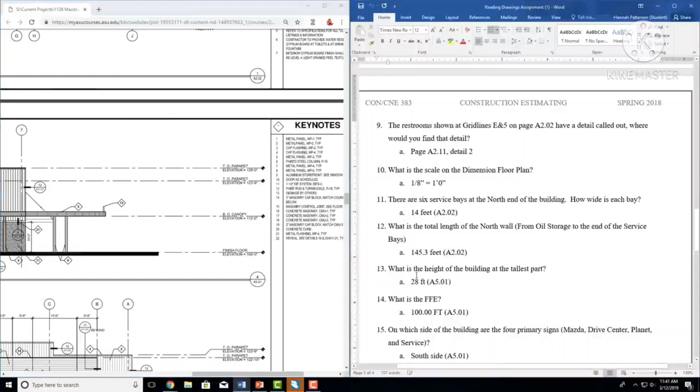So that also answers the next one. What is the FFE? FFE means finish floor elevation. What a lot of people mixed up is FF and E, so they thought, okay, that's an abbreviation.

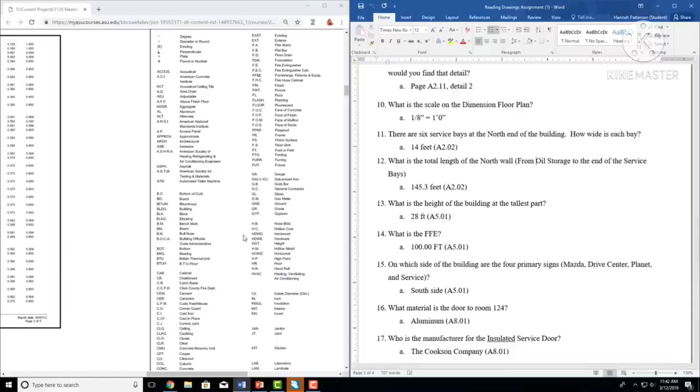I need to go to the abbreviations. However, this one is so common it's often not included. If we go here, we'll see FFE: furnishings, fixtures, and equipment. That's not what we're talking about here, because furnishings, fixtures, and equipment isn't really a sentence you'd have. You can't list all furnishings, all fixtures, and all equipment. So FFE is probably one of the most common, similar to FFE meaning finish floor elevation. That's not only used for exterior elevations, it might say door at 8-foot FFE. It's used in many places, so it's really good to know.

Next one: on which side of the building are the 4 primary signs, Mazda, Drive Center, Planet, and Service? Looking at this, which side of the building are the main signs? That means you need the exterior sides of your buildings. To find that, you go to your elevations, which is where we already are, and look for the signs. We found keynote 13 earlier showing a sign. There are no signs shown here, so this is the back of the building. That's 13 again, so that's the side. And here are the signs: Mazda, Drive Center, Planet, Service. That is elevation south, so we put south side.

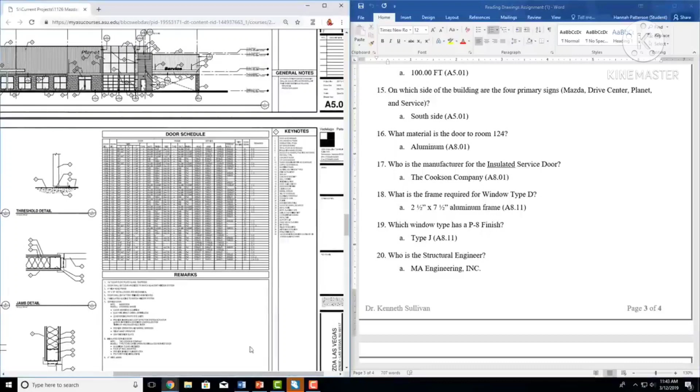Next one, what material is the door to room 124? Now we're not worried about our elevations, we're looking for a very specific thing about the doors. Doors will typically have door schedules, which happen to be pretty much right where we are, because again I tried to go in order. A door schedule will be set up like this.

Door number, room number, size, width, height, trim. This is telling you I have a 4-foot wide, 7-foot tall door with 1 3/4 inch trim. Door type is A, so you can tell when we go down here the different door types, so that's door type A. Material, aluminum. Finish, P16 - that will likely be a paint. Then size, the actual size of the frame. So this is the door, this is the frame, and this is the detail. Then you've got your frame size, frame type, frame material, frame finish, then details for your head and jambs, then the threshold, fire rating, door hardware, and remarks.

So we're going through - what is the material of the door to room 124? Room 124, right here, and I'm going to go over to material, and it's aluminum.

So we put aluminum. Then we're looking for the manufacturer for the insulated service door. That's going to be similar, where we're looking for door information. Keep in mind I put insulated. So here's remarks: service door manufacturer is Marathon. However, we have an insulated service door, so this is more about making sure students are reading and really looking at the details. The insulated service door manufacturer is the Cookson Company.

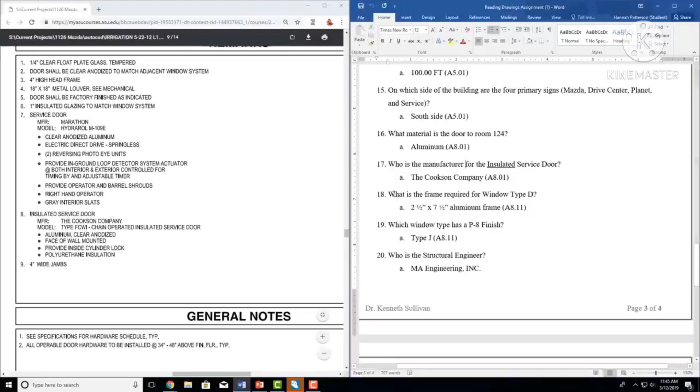Going to keep going. What is the frame required for window type D? That's going to be where I showed you all the different window types. This page is all window types and details. We want window type D. Something a little bit weird is it won't seem to go in order, it'll go kind of in reverse order. So we're going to start with A in the bottom right, then move left and up - it's almost exactly inverted. But we want window type D, so we go A, B, C, D. And we want the frame, so it's 2.5 inch by 7.5 inch aluminum frame.

Then which window type has a P8 finish? This is a little bit more of a Where's Waldo thing. But if we read this, it says frame, then the type of system, the type of glazing on the glass, and then the finish. If we go over one, this is the frame, manufacturer, glazing, finish - they all go that way. So you know this bottom one is the finish type, and it's none of these - these aren't P8. So we're going to go up. And ooh, we found a P16. That's not what we wanted.

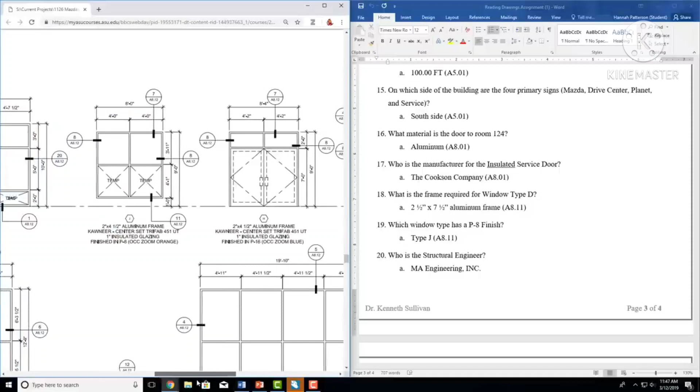And there's a P8. So it's type J, and I think there's actually one other. I believe it's M. Either one is fine, so it's P8.

We're then going to move on past the windows, and we want our structural engineer. There's a couple different places to find this. The first one is at the very top, where it had the project directory. Actually, there are so many places, because you'll first have your cover page, which will tell you that you have your structural engineer, MA Engineering. Then you get to the project directory, and you'll have that again. If you see that I'm going in order, it's probably on the next page, or a couple down, but here was where we were. MA Engineering, Structural Engineering Consulting. So we want MA Engineering there.

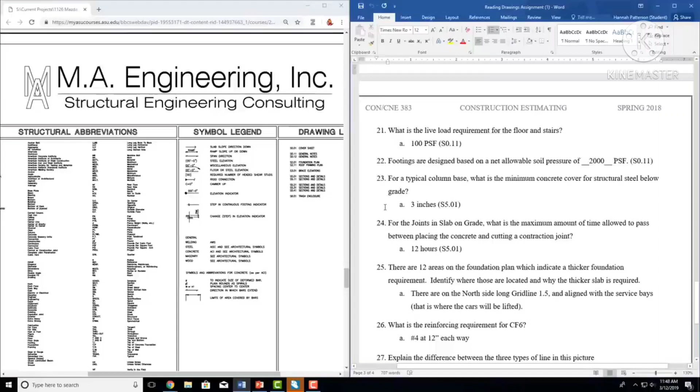Then we're going to get into the live load requirement for the floors and stairs. So now we're in only structural information. Our live load requirement is going to be somewhere in our notes, in our general structural notes, so we go down to those. And we care about the floor and the stairs with the pounds per square foot. We go down; in general, we're not looking at any of these. Then we start to see things that are separated out. So something like a live load requirement will often look a little bit different than the rest. These are just kind of big chunks of information, then it started to go a little bit different. So structural design criteria, floor live loads, floor and stair 100 PSF. So there we go, we have our 100 PSF.

Footings are designed based on net allowable soil pressure of blank PSF. So that's kind of the same question, except now we're looking for our footings. This isn't really what we want—we're in our building right now. So we're going to move over and then start at the top again. Here's our foundation. So it's based on the geotech report, and footings are designed based on a net allowable soil pressure of 2,000. Again, I tried to do it word for word just so you never had to worry about, oh, is this what she's looking for? And then keep going down.

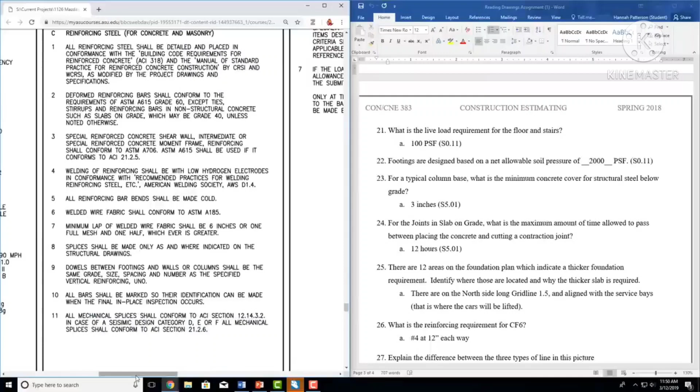For a typical column base, what is the minimum concrete cover for structural steel below grade? This could be in a few places. We're first going to look in the general structural notes—typical column base minimum concrete cover. This was all of our foundation, these were our general notes. So we're going to go over, and we see that this is reinforcing steel for concrete and masonry. That's kind of what we're looking for, because we want the minimum concrete cover for structural steel below grade. You can read through all of this, however, it's not in there. So then you're going to go over, double check, specialty items, pre-engineered—not what we want—and special inspections, not what we want. So it's not on this page, which means it needs to be somewhere else in the structurals.

In order to find that, we're just going to keep going and see what we can find. This is our foundation plan, however, this is all very general. We're looking for something very specific, the minimum concrete cover. So we're going to go down again to our notes, and this is going to look much more like what we want—a typical column base. In order to find that, again I tried to keep it pretty much exactly what it would be, and we have typical column base. So you zoom in on that, and we're looking for the minimum concrete cover for structural steel below grade. Just read through around these and look until you find that. Right there: concrete cover at structural steel below grade, 3-inch minimum. So we found that. Now we're going to keep going.

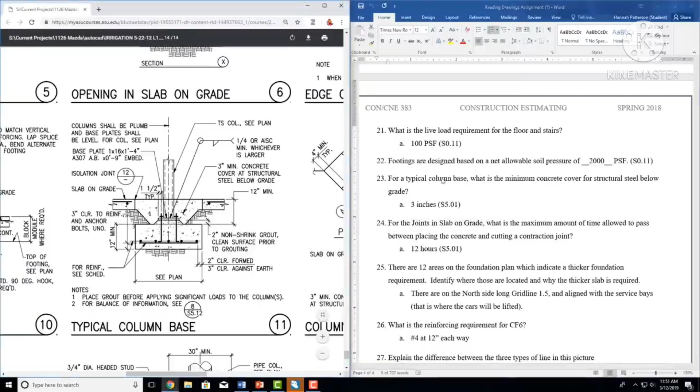For the joints in slab on grade, what is the maximum amount of time allowed to pass between placing the concrete and cutting the contraction joint? That's going to be something similar again, where it might be in the notes and it might be in a detail, but you kind of just need to look for it. I tried to hint towards it by capitalizing this. So just as I said exactly a typical column base, this is joints in slab on grade, joints in slab on grade.

So I'm going to zoom in on that, and we're going to find the maximum allowable time. Saw cut 1/8 of an inch wide contraction joint at a depth of T/4 minimum. Sawing must occur as soon as concrete surface is firm enough so concrete will not be damaged, but no later than 12 hours after it has been poured. So 12 hours is the answer.

We're then going to get into a little bit more of critical thinking. There are 12 areas on the foundation plan which indicate a thicker foundation. Identify where they are and why it's required. So first off, we go to the foundation plan.

So we know that's right there, and it's going to look like this - a lot of lines, a lot of dotted lines. This 45 degrees again shows masonry, and this dotted line around is a continuous footing. So this is our slab right here. This whole thing is going to be a concrete slab, so it says concrete floor.

And then 12 areas where it's thicker. It's going to be 1, 2, 3, 4, 5, 6, 7, 8, 9, 10, 11, 12. So 12-inch thickened slab typical - that is a 3 foot by 3 foot square of thickened slab, 12 times.

So think for a second why that might be, because you have to think about your building. If we go up again to the architectural plan, let's see where those are. They're at the north side, and they're right here, so they line up exactly with the service bays. So those are thickened slabs because those are the car jacks that are shown. It's the service area where they can jack up the cars to work on them. They need to be a thickened slab to support that weight.

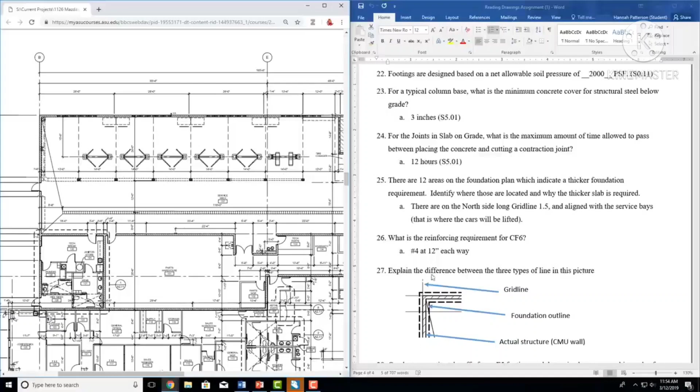So we're then going to go back down to the reinforcing requirement, all the way back down. And so we want the reinforcing requirement for CF6. First thing to note, what is CF6? That is continuous footing number 6. So a continuous footing will go around the building basically continuously.

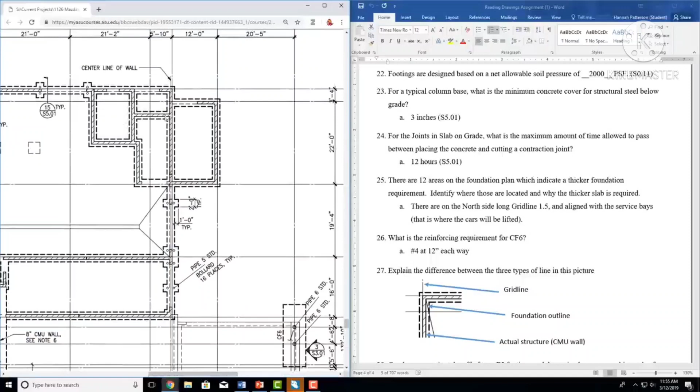So in order to do that, you need to find a footing schedule. Just like there are door schedules, there are footing schedules. We're going to zoom out, and it's going to look like a little table, and it's right there - so there's our footing schedule. We know we have 3 types of continuous footing and 3 types of isolated footing. So CF versus F. Width is going to be 2 feet for this one, and length is just going to stay continuous because it doesn't have one set amount.

So it's just going to go around until it either meets itself or changes into a different type of footing. So all of these - see that CF2 is showing all of this is CF2. Then we're going to go back. So we want CF6 reinforcing requirement. This is telling you CF2, width of 2 feet, length is continuous, thickness is 12. That's telling you how deep and how wide. The reinforcing - there is no reinforcing at the top of CF2, and there are 3 number 4 rebars continuous at the bottom.

So it might be easier - CF6, here's the answer. Reinforcing is number 4 at 12 inch each way, top and bottom. So that means there are number 4 rebars at 12 inches, so it's going to go rebar 12 inches, rebar 12 inches, rebar 12 inches, going each way. So it's good to just understand what this means, because you can look at this and write down the answer without actually understanding it.

So they're all number 4 rebar. A good example, footing 6A has 8 number 4 going each way, so it has a very specific number. These are saying every 12 inches put a piece of rebar, because this is a footing with an indeterminate length. This is called an OC requirement, an on-center requirement. So every 12 inches on center, you need to put a piece of rebar. This is telling you you need 8, so this is giving you the specific number that are needed.

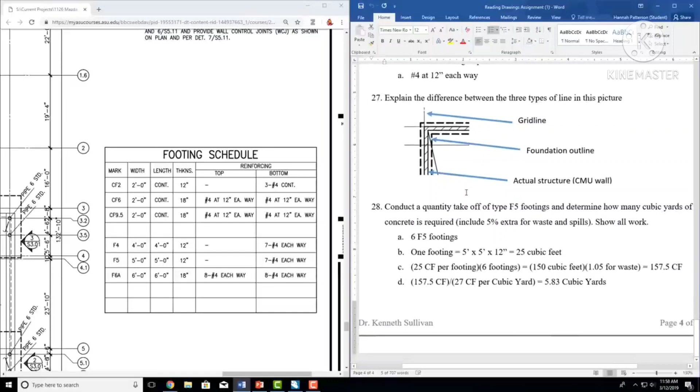Alright, our final question is more of an estimating one than a reading drawings one, but we're still going to do this. So conduct a quantity takeoff for type F5 footings. Determine how many cubic yards of concrete is required. Include 5% extra for waste and spills, and show your work.

So the first thing we need to find out is how many F5 footings. That's what doing a takeoff means - going to the drawings and taking off those quantities. F5 is an isolated footing, which means it's not going to be in this area, these are all continuous footings. I talked about it a little bit earlier, and it's right here, F5.

So all you have to do is go through and go, alright, there's 1, 2, 3, keep going, and there's none there, go down, 4, 5, and 6. So there's 6 F5 footings, and then figure out the cubic yardage in one footing.

So go back to your footing schedule, and an F5 footing is 5 feet by 5 feet by 12 inches. Watch that right there - it's not a 12-foot footing, it's a 12-inch footing. So that means it's going to have 5 by 5 by 1 cubic feet, but I want cubic yards. In order to go from cubic feet to cubic yards, you divide by 27. Even though I solved this, I'm now doing it differently, so I did that down there.

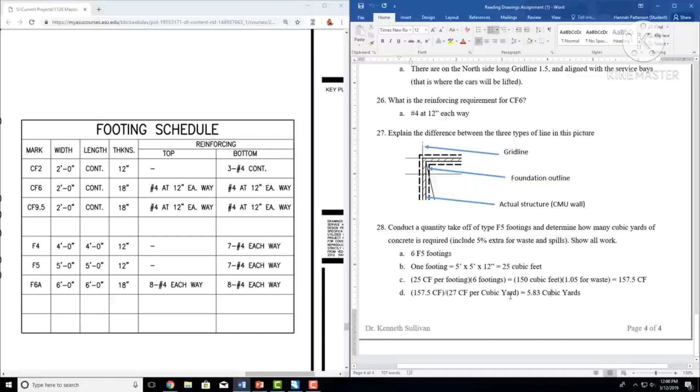So that's all we have for this assignment. Hopefully it's helped you understand drawings a little bit better, kind of critically thinking - alright, is this something where I need a dimension and I'm looking at a floor plan? Is it a concrete structural question where I need to be in the foundation? Is it an elevation where I'm on the outside, cross-section on the inside? Is it going to be a list of information like a door schedule? Is it general information like a note? Is it somewhat specific like a keynote? And where do I go if I need to find it?

A good thing to know, you can also just Google things. Chances are if you Google what does this symbol mean, something will come up. There's something different on every set of plans, so no one really knows everything there is, but hopefully that was enough to give you the baseline of how to read construction drawings.